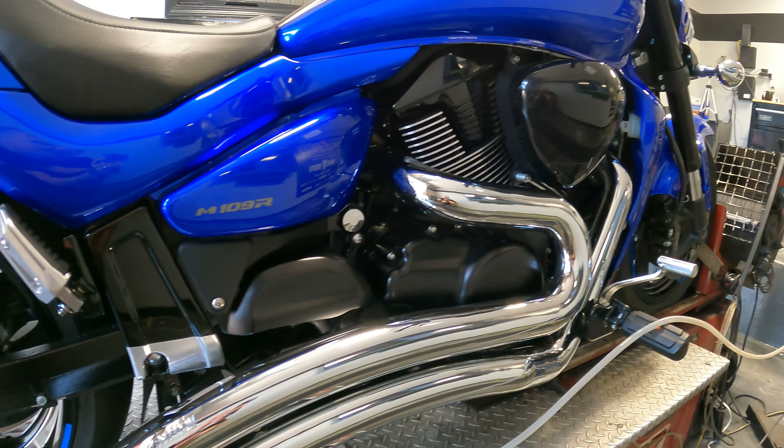Throttle off, boom, throttle on, the thing kicks in, throws your head back, and literally the bikes ride terrible. They really do this with stock exhaust, but when you put aftermarket exhaust on them, they're way, way worse. This customer has the Freedom Performance exhaust system, and he also has a set of K&N drop-in air filters. Now, just installing those K&N air filters alone will make the bike run even worse.

In other words, the airflow is too much, the bikes don't get enough fuel in them from the factory, and man, do they ride crappy after a few modifications. We're gonna fix it all today. Stay with us, guys. Here we go.

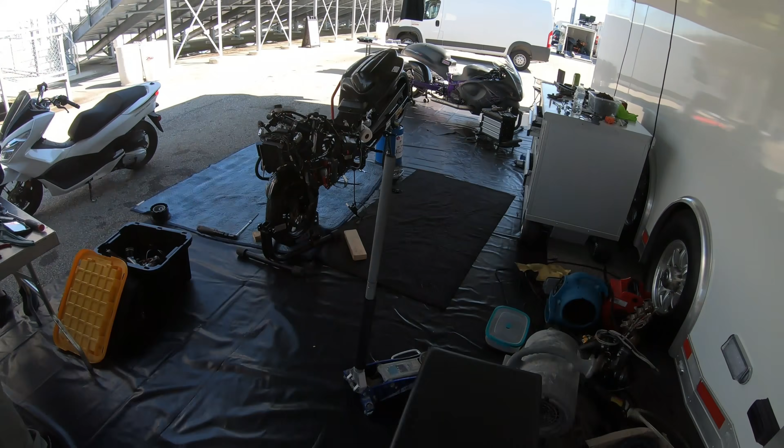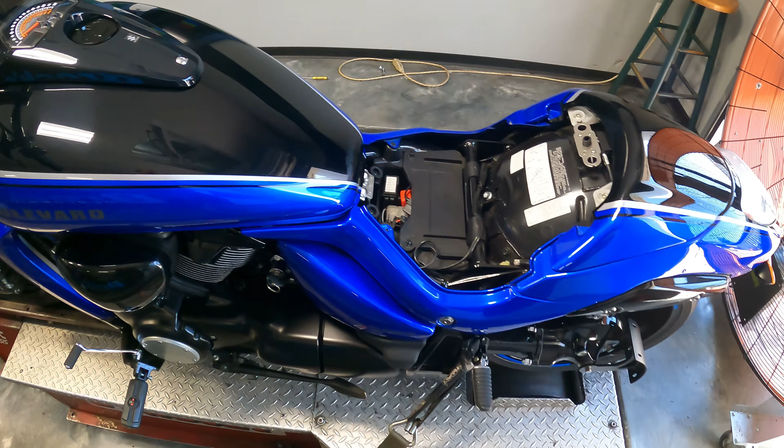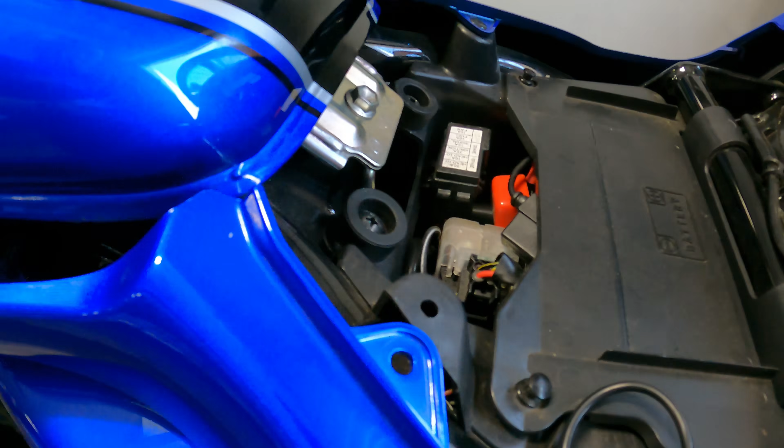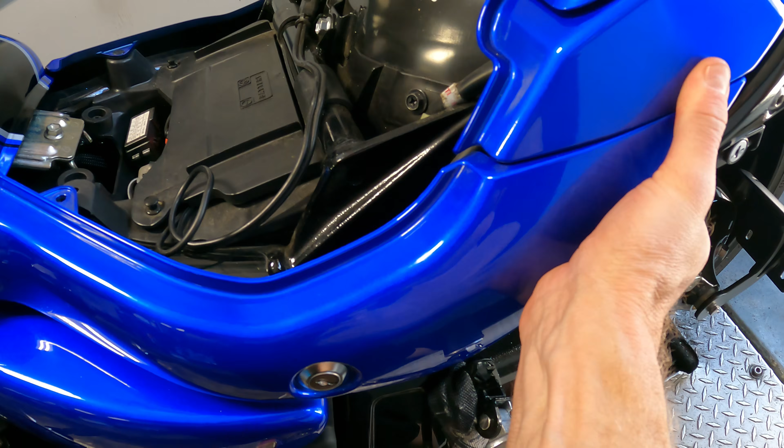Little quick tutorial on how you can remove your ECU on your M109R in order to get it flashed. First thing you want to do, remove the seat. I already popped the seat loose before I started the video. Then you're going to take this panel here and just simply pull it back, and you also have to remove this push pin here. I did a few of these things prior to starting the video just for time's sake to make it a little easier. Then with two hands you're going to gently pull this back. I already did all this too, makes it a little easier.

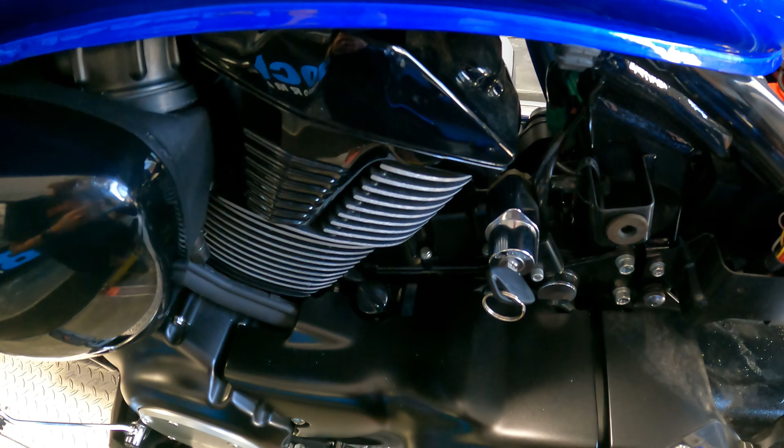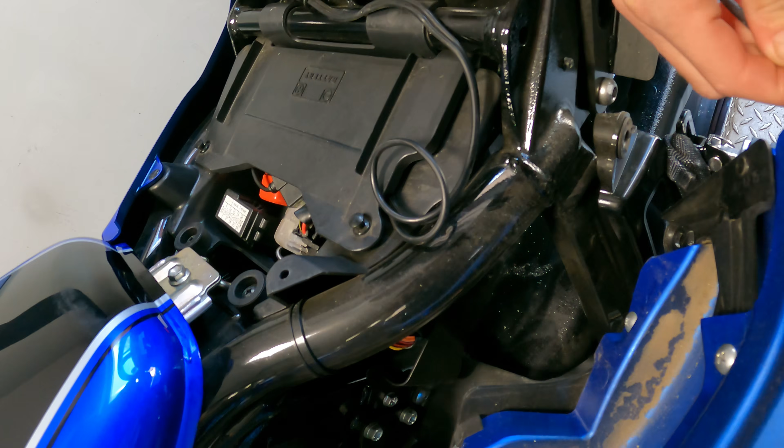See that little grommet, that thing there, they pull apart. You see there's also another one there, and the thing just simply pulls off, okay? Once you have this removed, I'm gonna go ahead and disconnect this cable here. Hopefully I can do it with one hand. Hold your breath. All right, there we go. Now this panel is completely removed, all right? We're gonna set this to the side. And that right there, folks, is our ECU.

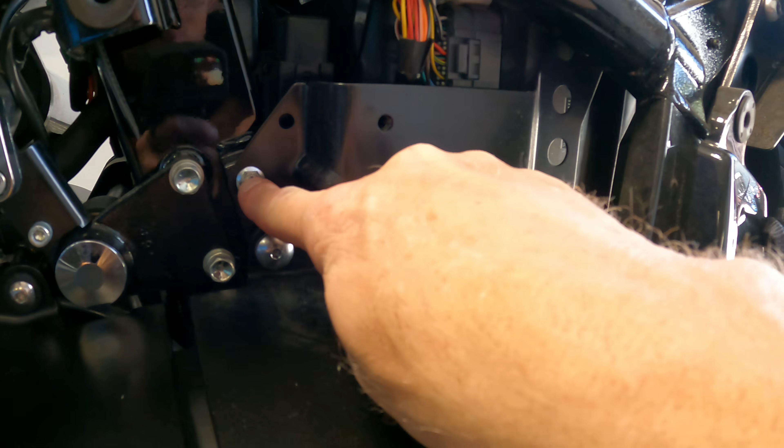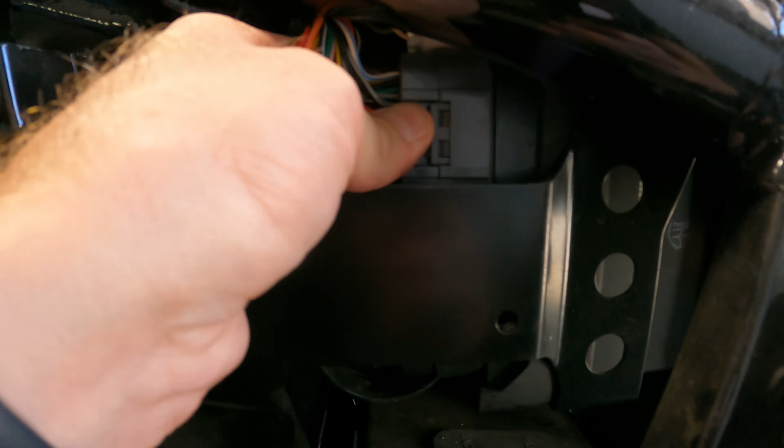You're gonna remove this bolt here, pull this panel back, slide that ECU out. I'm gonna go ahead and unplug one of the plugs now, just so you can see how you do it. Push in with your thumb, pull back, and it's a little tight, but just like that, it comes off. And then when you go to reinstall the ECU, it'll just push and lock back in. You'll hear the little click. That's the end of it. Go backwards for your installation, and boom, you got your ECU in and out really easy.

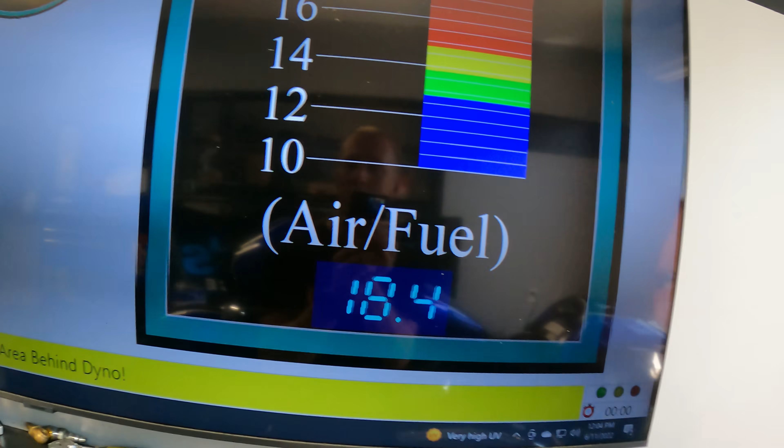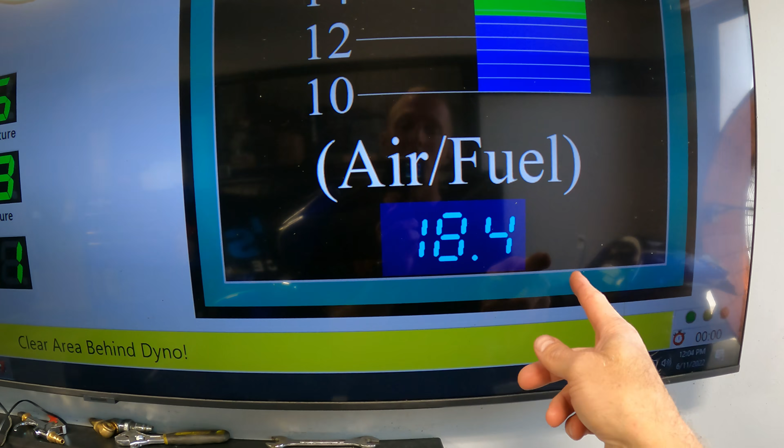The M109 is loaded up on the dyno. Everything is ready to go. This right here, guys, is the air-fuel ratio. Once we get this running, we want this thing to cruise around in the 13s or 14s, okay? Mid-13s is gonna be the smoothest. As the numbers go higher, the bike is reading lean. So 18.4, that's as lean as it will go. That's because the bike's not running, so of course it's not getting any gas. You'll see the RPMs here, you'll see the speed here.

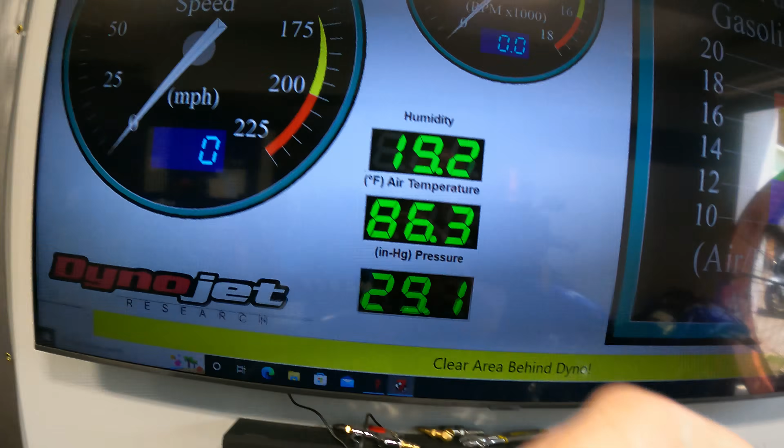Now, since the bike is so loud, I'm having to tell you all this stuff before we get going because you're not gonna hear me once I crank the bike up. But watch, what I'm gonna do is just maintain speed on the dyno. I'm gonna put it about 45 or 50 miles per hour, typical cruising speed, and I'm gonna just try to hold that. Well, I'm gonna let off the throttle, and I'm gonna just barely go back to the throttle. Watch how jumpy the bike is. You already know all this stuff if you have the bike, but I just wanna show you kind of a before and after once we get this thing going, all right?

Let me make sure you can see the bike good. We'll move you down just a smidge.

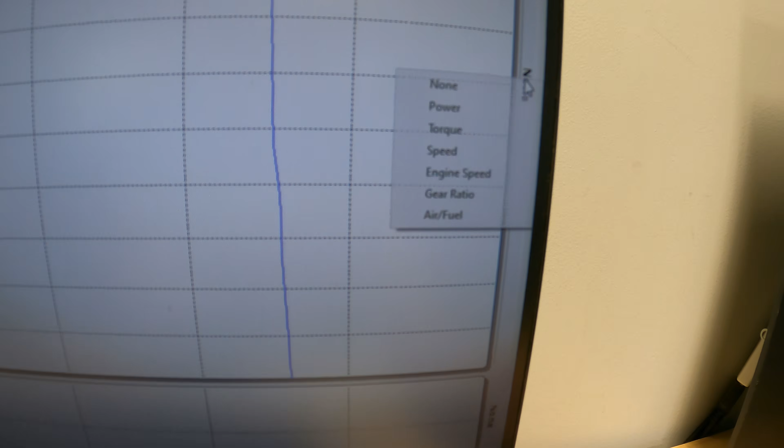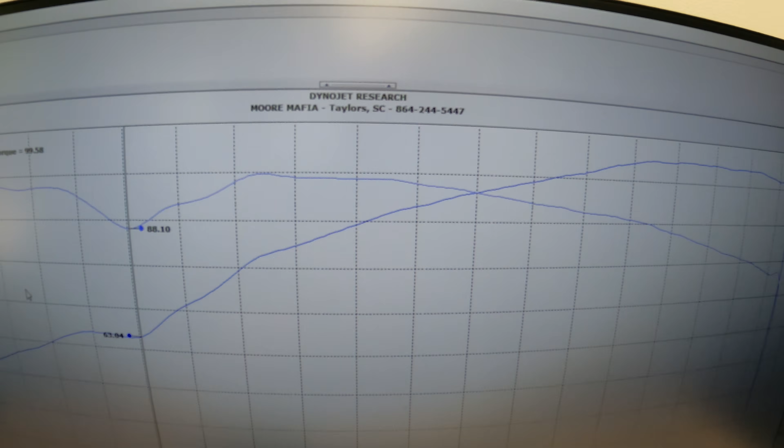So you saw the terrible performance, all the dips in the power, all the crazy lean spikes in the air fuel. Let me go in and show you what all we can do in the ECU of this thing. We can disable the O2 sensors so you don't need those. We can disable the exhaust valve so you don't need to buy a servo buddy. And we can disable the deceleration fuel cut.

So when you let off the throttle from the factory, the injectors cut completely off, meaning the bike is getting no gas. Well, whenever you go to give it gas, boom, it resumes and it hits really hard. Well, when we disable that option, when you let off the throttle completely, the injectors keep spraying just a very fine little bit in order to keep a little bit of fuel in the system.

Then when you go to resume throttle, there is no instant abrupt hit because it's not fuel in, fuel out. It's always fuel is there, so it's gonna continue to be smooth and it eliminates all that on-off throttle feel. We can also lower the fan temps, which is gonna help the bike run much cooler. Let me show you one more thing though. We're gonna be real quick with this because we've already done this in a video on the M109 before.

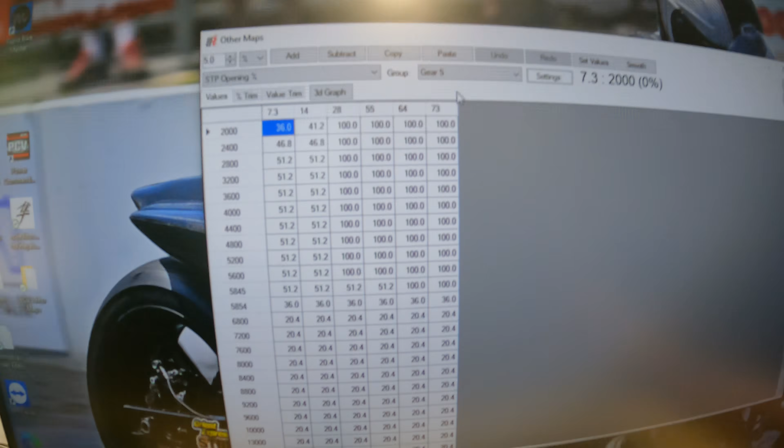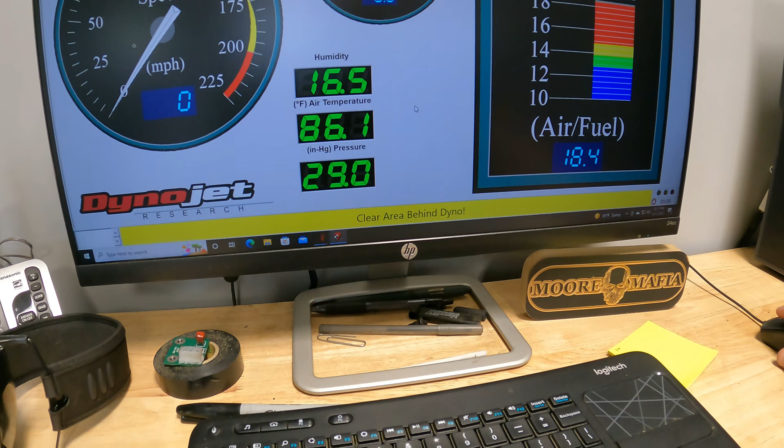You can see this thing, these are the secondary throttle plate openings. So you can see in 5th gear, when you go wide open, it stays wide open and then all of a sudden, boom, at 6,000 RPMs, it cuts back to 20% throttle. Yeah, that's right guys, there's a top speed rev limiter on this thing that holds this thing back, limits the top speed. We remove all that stuff, get rid of all that. You're gonna see it in the dyno graph here in just a second. We will show you what this thing is like before and after.

The tuning is about finished on this M109R. This thing sounds and runs so much better, so much cleaner. And as far as fuel mileage goes, it shouldn't really lose too much fuel mileage. Now, granted, I say lose. You're like, gas is $5 a gallon, we don't want to lose gas mileage. We can't add fuel to the bike and make it run smoother and not make it burn a little more gas.

But in most cases, they don't really lose fuel mileage because the bike makes much more power at the same spot that the bike doesn't have to work as hard. So where you were having to stay in the throttle to go, now you can ease off the throttle and the thing will still carry and maintain the same speed, meaning that it actually uses less gas. So overall, you're not gonna really complain about the gas mileage because the thing is gonna ride so much better.

We've gained some good horsepower, we've gained some good torque in the low RPMs. On top end, these things are not crazy bad off. We actually have to richen them up. They make a little more power running super lean, but when they get going down the road and the air intakes are getting the most air, the bike is even leaner, which we can't show on the dyno. I guess you would say, accounting for the ram air effect on this thing. So let's try it out, see what we got, and go from there.

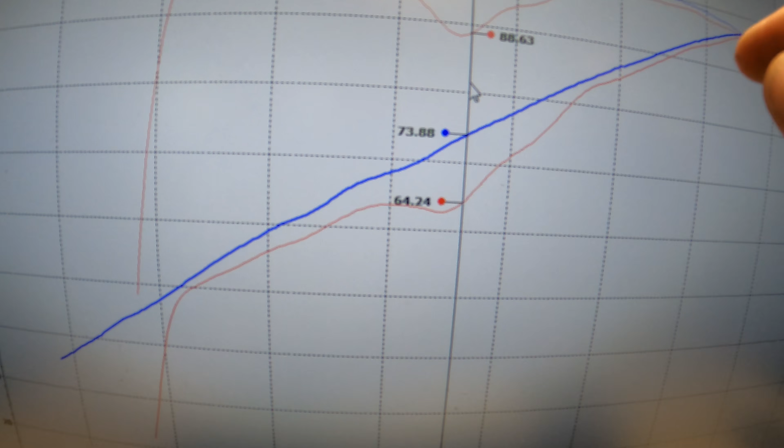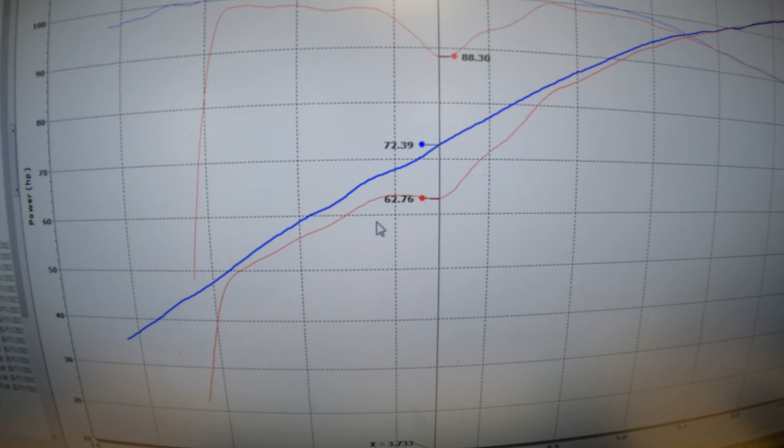Like that, the M109 is finished. We got the final results pulled up on the screen. Take a look here. The blue line is our new, the red is our old. Look at our gains down low. So as soon as we crack into the throttle, 2,500 to 3,000 RPMs, you got an instant horsepower increase and big torque increase. And then as we go through the RPM range, where this thing really starts to stumble and fall on its face due to not getting enough fuel, you can see we've got huge gains there as well.

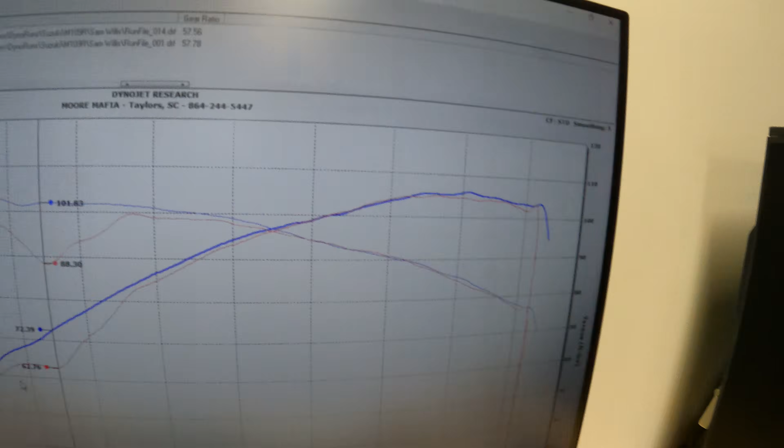We went from 88 foot-pounds of torque to 101. Big gains. Horsepower gains up top, only a couple. We went from basically 105 to 106, which is not a lot. But like I said, the guy's not here to make more horsepower. He's here to make his motorcycle ride better.